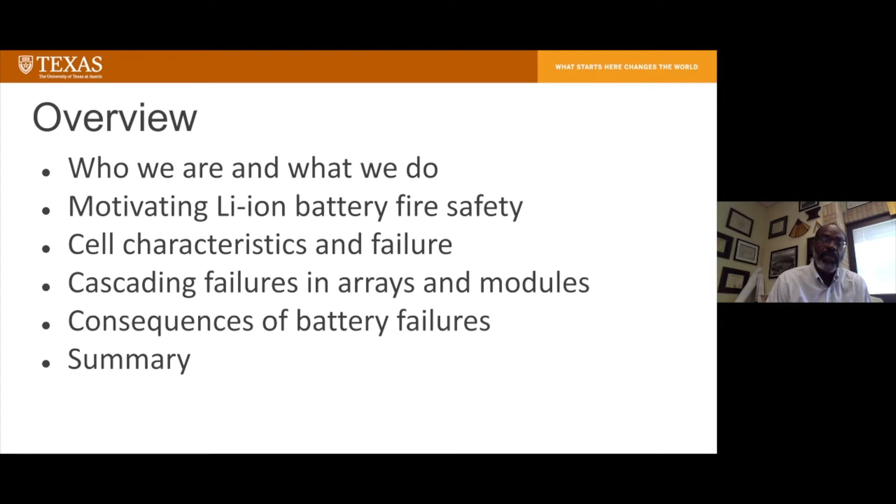We work on emerging issues in fire safety, and we've already pointed out some of these issues. Obviously, wildland fires are an extremely important issue right now, and we have work going on in that, in terms of ignition and ignition associated with firebrands.

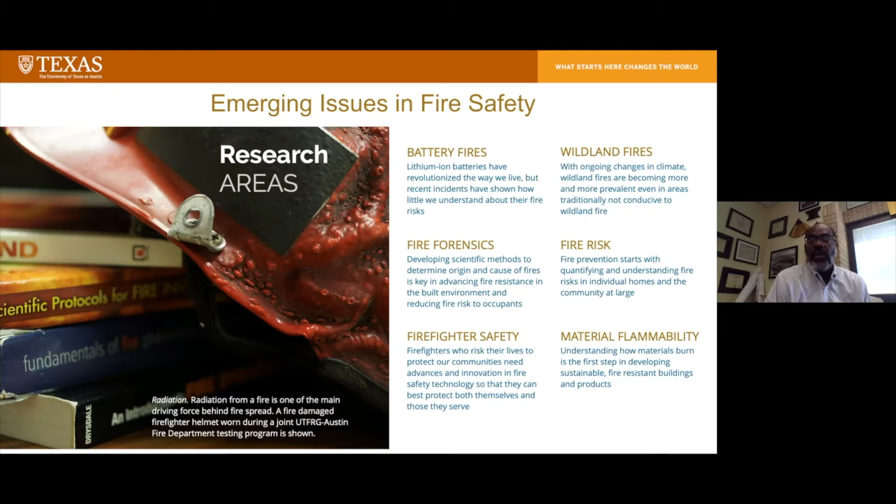In this talk, we're really going to talk about battery fires, which connect to our work in fire forensics. We'd like to understand the future of fire forensics and how to use data and models to improve the ability to understand how a fire occurred. These obviously all connect to firefighter safety. So let's keep moving.

In terms of motivation and background, as you can see, I am not a battery person, but battery issues are obviously very important as one of these emerging fire safety issues. I've been trying to learn as much as I can about battery issues, and you'll see what I'm learning as we go through.

It's no surprise that we're entering an increasingly electrified world, and these are good things, a positive. Distributed energy generation resources are allowing a lot of things in terms of protection of the environment and access to multitudes in the world that we really haven't looked at in terms of energy resources. Immediately, the things we see are consumer electronics, electric vehicles, and every so often, as we walk around our neighborhoods, we see solar panels and the connections between all of these.

In general, in my opinion, battery systems are quite safe, very safe. That said, opportunities exist to improve the safety and performance. Quite a bit of work is going into performance. The University of Texas at Austin, my department, Walker Department of Mechanical Engineering, is a leader in the development of lithium-ion battery technology and other battery technology. A lot is going on in this space, and our view is that as this is being developed, there's a real need to understand and improve the safety issues.

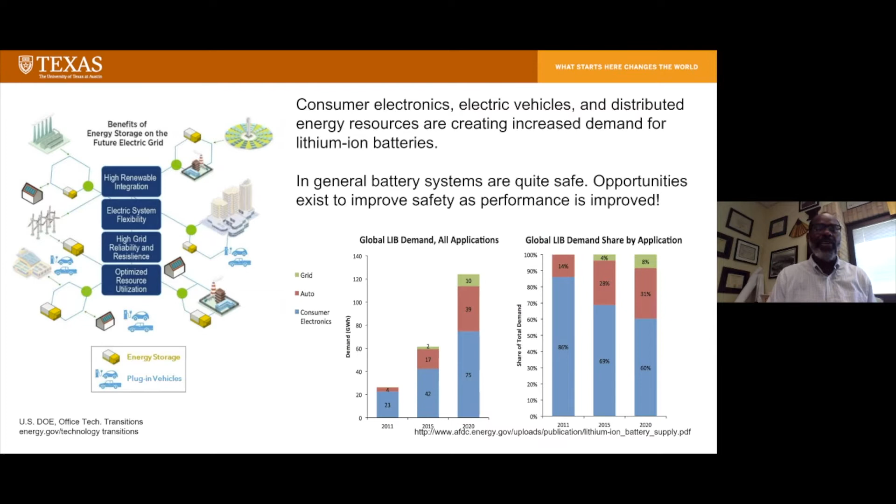These are old, relatively older demand forecasts. We're in 2020, but the growth forecasted for lithium-ion batteries is spectacular. I was disappointed that we didn't hear about a million-mile battery, but there are still lots of opportunities and development in this space. These systems are going to continue to be used.

Again, what the applications are - we see this routinely. Perhaps less so is an awareness of what happens at grid scale. We see this in our phones, which are on the order of 10 watt-hour systems. This is a varied audience - I'm going to be speaking to some people who are experts on the battery side, some experts on the fire side, others who are just interested. So I'm going to offend everybody, basically.

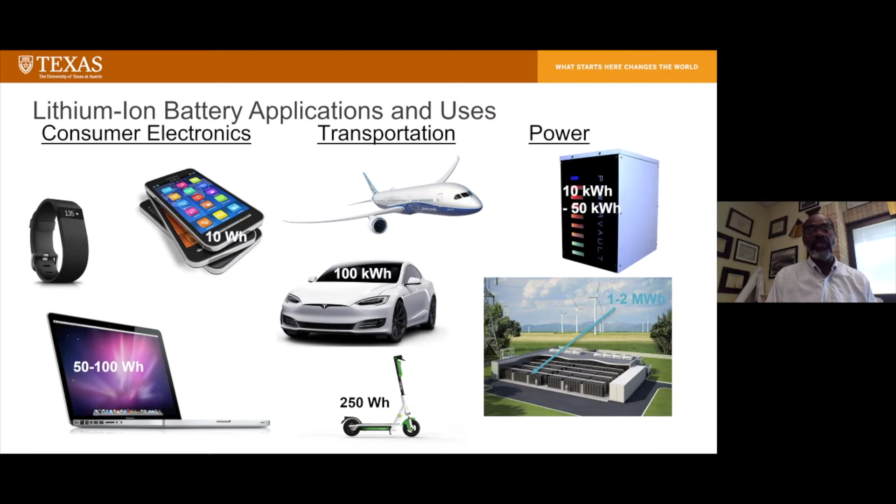Laptops might be 50 to 100 watt-hour systems. We're talking about the energy available, or the capacity, of these systems. You might have 100 kilowatt hours within an EV, but you could have 1 to 2 megawatt hours in a containerized system, just one of these little containers within a larger energy storage system for grid scale or utility scale applications. So there are lots of scales in terms of what we're dealing with here.

Now, one of the important aspects of renewable energy and sustainability is the circular economy. Many of you know this - shown on the left here - it would be great if we could recycle and return things to some previous state after use. That's wonderful, something I think societally we want to move towards. We view that as an important issue, but there's another circular economy associated with safety, and that's what you're seeing on the right there.

As cells are being used in various types of applications, there's a logistics process occurring too in terms of storage and transportation, use, end use, transportation throughout, and there are stop signs and checkpoints where standards - working with fire service, codes and standards officials, authorities having jurisdiction - evaluate the overall safety of these types of systems. This is borrowed from a friend and colleague, Ron Butler, mentioned earlier.

Based on his holistic view of safety in these systems, this is something we think is an important aspect of this other circular economy. It's a safety circular economy that we need to be thinking about.

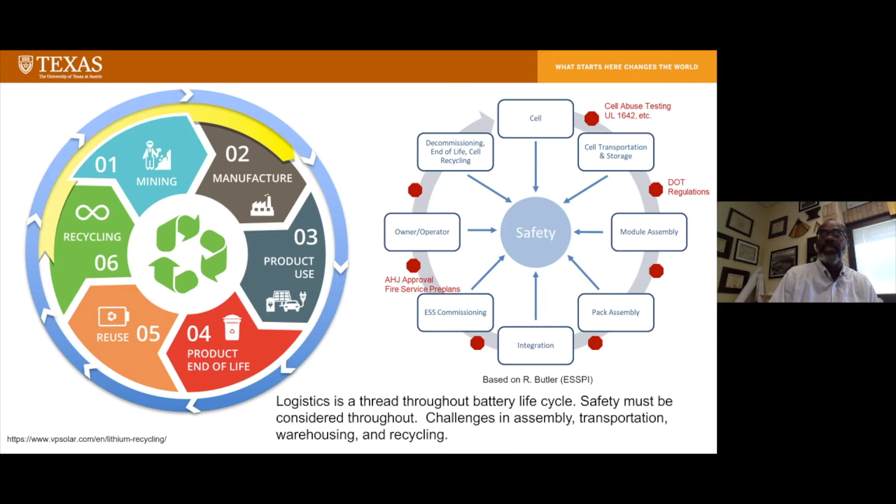I'm not trying to be the bearer of bad news and doom and gloom, but bad things happen in uses of batteries. We want to understand those cases so we can design systems to mitigate failures. Failure data is relatively hard to get for battery systems. We think it's 1 in 10 million cells, but it's very difficult to assess the frequency of failure. But every so often, cells do fail.

On the left, somebody is running a gig economy business charging scooters in their garage in Fairfield, California. In the top right, someone was doing something similar with electric bicycles, charging them out of their garage. Unfortunately, there was a fire. I can't say if the fire was because of the batteries, but fires happen routinely. The fact that there were batteries there increased the consequences, elevating it to a hazardous materials fire. Several firefighters and police officers were hospitalized because of toxicity issues, and there was a shelter-in-place order for that neighborhood. You see the street closed off, and there were lots of news stories about this hazardous materials problem.

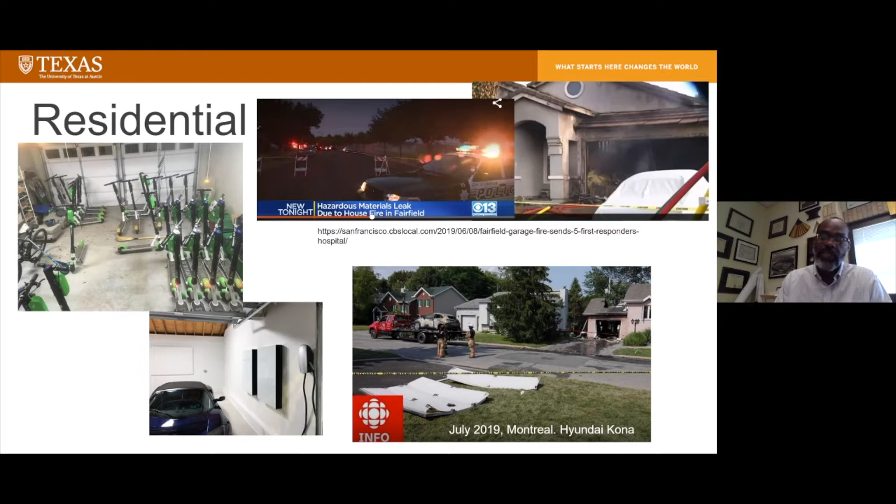We need to understand what sensor systems, detection systems, and suppression systems might mitigate something like that. On the bottom left, we see an EV in a garage with an energy storage unit. To the right is an accident in Montreal in 2019, where a Hyundai Kona was in the garage, and you see this gaping hole in the garage roof and the door blown across the street. There was a failure centered around the Kona's electric vehicle systems. This explosion, as much as it damaged the property, could have been even worse, with graver consequences had people been injured. How do we address that? How do we deal with it?

In terms of transportation, starting at the top right: in Houston, there was a train car carrying recycled batteries, and the conductor noticed smoke coming out of one of the cars and stopped. Subsequently there was an explosion, and you see the deformation of the car, with windows broken up to about a mile away. Fortunately it was a relatively sparsely populated part of Houston. But if first responders had responded to the initial notification of smoldering or fire within the rail car, they could have been severely injured.

It's interesting that in Bakersfield, California, a semi-trailer truck was carrying lithium-ion batteries and started smoking. The driver noticed something wrong and stopped. Fortunately, because of awareness of the potential hazmat and explosion possibilities, first responders shut down the highway and were much more careful in their response than may typically occur. So that's part of the transportation and recycling story.

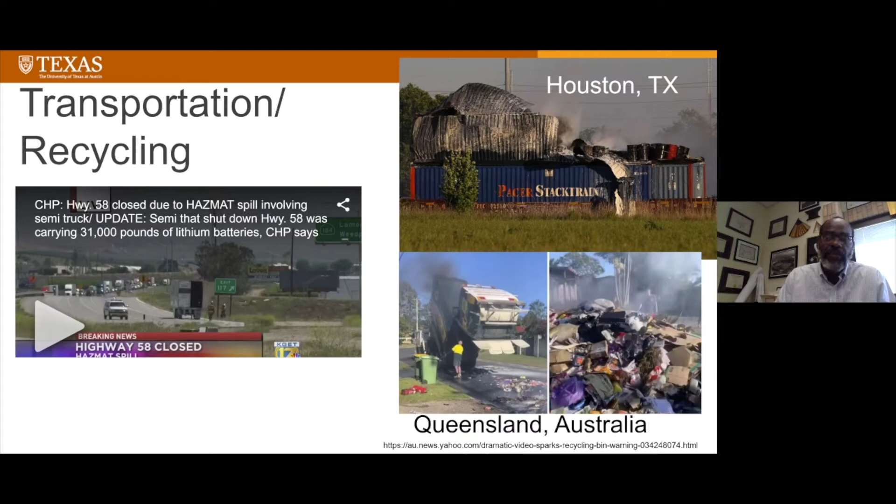In Queensland, Australia, and this is happening in the US and really all over the world, improper disposal of batteries is causing fires both in transport and at recyclers. We've gotten smarter at the University of Texas, for example, about what it means to deposit used batteries, because of the fear of fires in trash receptacles.

In terms of commercial and academic facilities, renewable energy is providing all sorts of opportunities for the storage and use of electrical energy. Not surprisingly, big box retailers and warehousing companies like Amazon and Walmart were putting in solar panels and energy storage, but it's really the solar panels — solar panels and energy storage oftentimes go together.

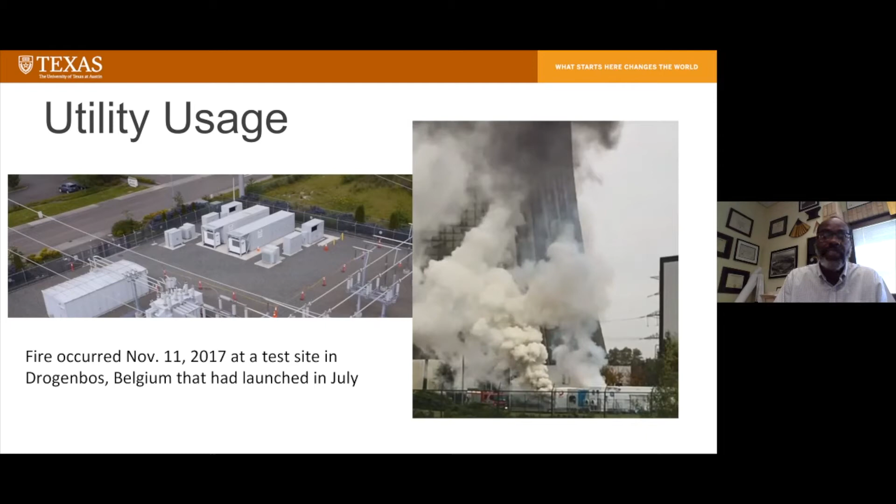In some sense the costs there are modest or moderate in terms of damages. There were several fires that occurred in energy storage systems in South Korea in 2018 and 2019, and that number continued to increase - initially 25, 26, it just kept climbing. There were environmental issues and use issues in terms of why these fires and failures occurred, and it's something we'd like to understand better so we can minimize these types of losses.

Closer to home is a failure that occurred in Surprise, Arizona, not too far from Phoenix. You see at the top right a containerized 2 megawatt-hour ESS with 64 amp-hour cells in modules stacked in a rack. At the bottom right, from the DNVGL report, is rack 15 where the failure occurred. What's interesting is how relatively little damage there is to the racks adjacent to it compared to this initiating rack.

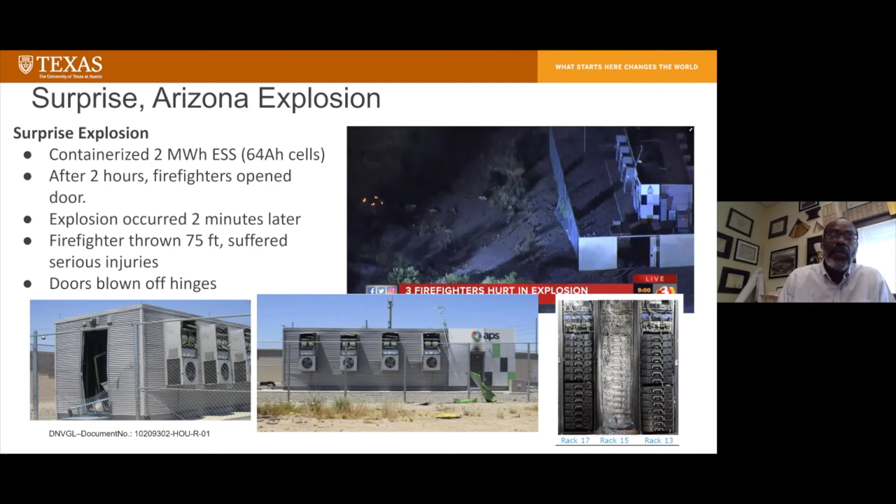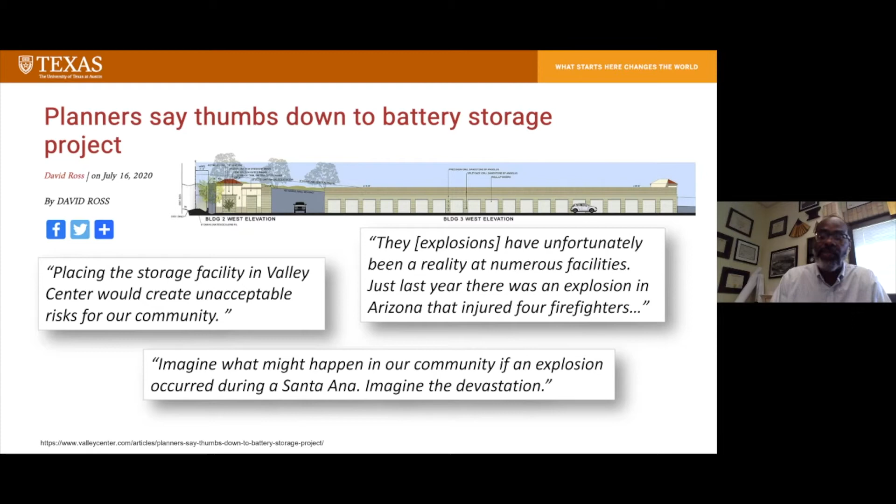So why do we care? There's growth in this market and demand for energy storage and lithium-ion batteries. But after accidents like Surprise, and a general awareness that maybe we aren't considering all the safety implications of these systems, people are responding negatively. It's damping down demand, even though there may be other positive reasons to move forward with these technologies. The inability, or at least perceived inability, to make them safe enough - which is often a moving target - has caused concern, and these are the types of issues we want to address through research.

You might ask, why do these failures keep happening? This isn't unique to batteries or battery systems - it's true of immature technologies. We're transitioning our energy system in a way where there's very little data on what to expect. This is a well-known diagram adapted from work done in Japan by Shiraishi and Furuta, who show that as you look at the percentage of failures that occur with technologies, in the early stages everything is essentially unknown, and it's these unknown conditions and phenomena that trigger failures.

Research is one of the bridges that helps us understand better how to think about those technologies, so that improvements can be made and this understanding can be codified. Given that it's codified, fewer of these failures are associated with unknown issues - they become known issues.

As we learn more, we know, well, yes, we should have designed against that because we know X, Y, Z. Eventually these things become human error, and obviously the failure rates in general presumably will go down. So these are the types of issues we're wrestling with in this relatively immature technology.

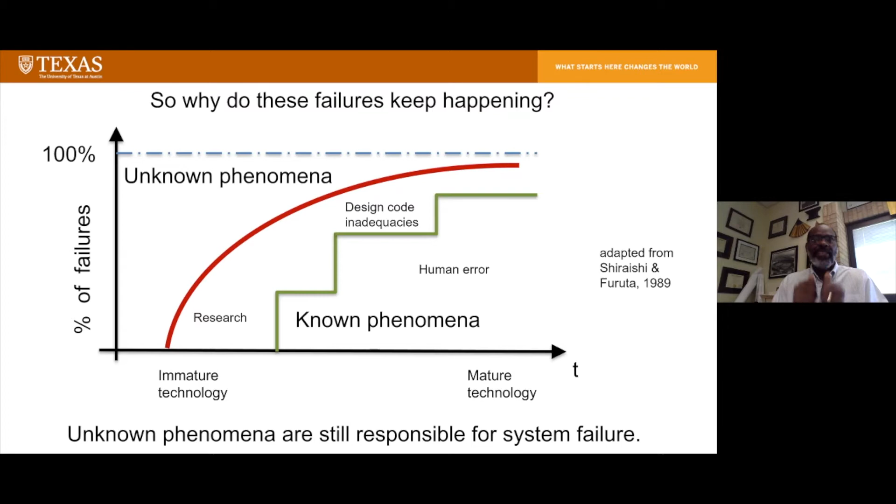The other thing I want to emphasize is that we're talking about systems, really. It's not just the cell or the battery, it's the battery system, and lots of different components to that. This is a test that was conducted by the FAA in a fire-resistant container.

Let me walk you through what the issues are. There are 18650 cylindrical cells in this fire-resistant container. A fire is deliberately set in there to understand the ability of a suppression system to extinguish the fire. The suppression system extinguished the fire, but the cells continued to go into thermal runaway.

There's this cascading failure that I'll talk about some more. As the cascading failure occurs, there's a buildup of flammable gases that leads to an explosion. Well, that's not that different actually from what happened in Surprise. This is much earlier than what happened in Surprise.

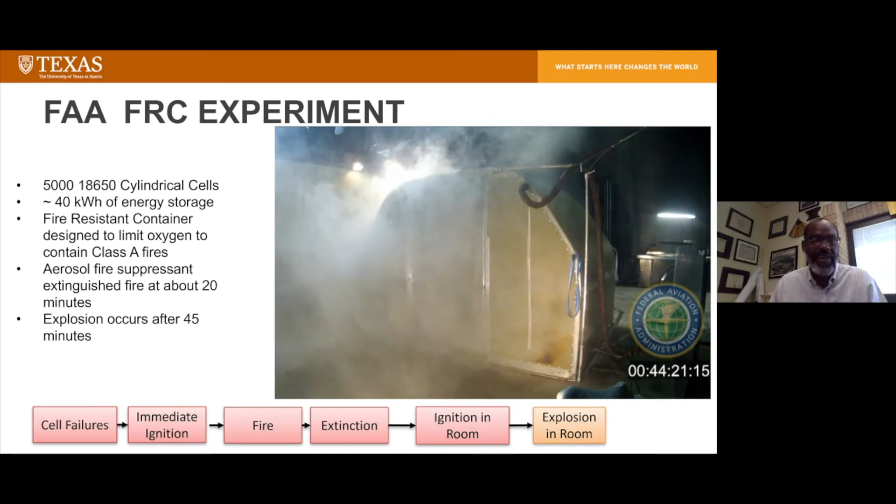So we're starting to see that we can actually connect the dots in different incidents under different conditions to show how failures occur in battery systems in these bad consequence, bad direction events. So that's a placeholder to think about as we move forward.

One of the big issues, true in all of engineering science, and true in this aspect of engineering science, is that as you try to bridge scales, you have to lose some detail in terms of understanding what might happen at the larger scales.

If, for example, we're interested in the consequences of the fire, in terms of the consequences of failures in terms of fires or explosions, that might be at the far right here at the site scale. It could be a room, it could be a building, it could be a container.

This is due to some failure that occurred in the cell. That failure in the cell could have been a manufacturing defect. It could have been a failure of the software system that's operating either the cell or the module that contains the cell. And so bridging these scales is the challenge.

We've tried at least to understand how failure at the smallest scale might affect things at these larger scales. The photos you see here are different cells that might be used in a system—there's a cylindrical cell, there's a pouch cell—and these are packaged into modules. These modules are packaged into racks.

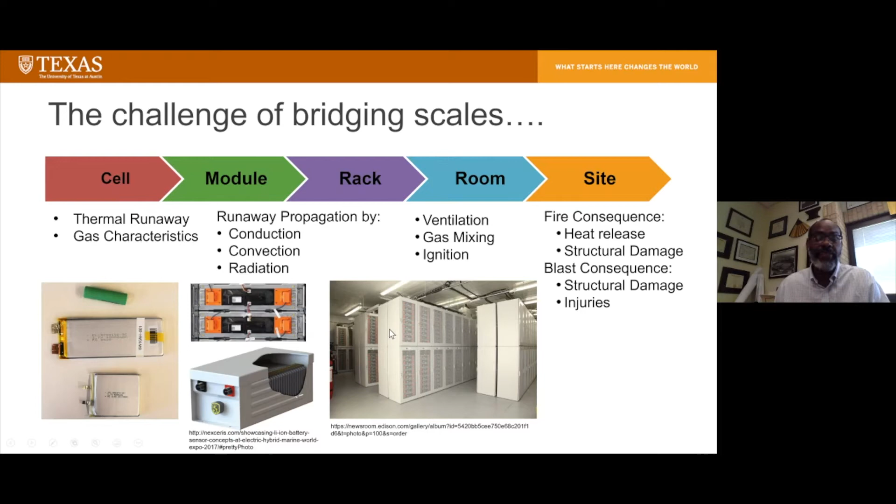You can have these in rooms, much like server rooms, and then you can have many of these at a site. So to perhaps understand and bridge that, there has to be some systematic framework or process to evolve the understanding at the cell scale to the module scale to the battery scale.

But batteries are expensive, so if you want to analyze a megawatt hour system, very few people have the $1 million to just burn, and we certainly don't. And so from that perspective, there is increased use of models as we upscale.

Even looking at a rack, you might be spending, in terms of testing, $100,000 or more to really understand how a battery rack fails and what the issues are associated with that. So obviously there's the need to minimize full-scale or close to full-scale testing, yet try to engage in as much testing as you can at smaller scales to understand what might happen at larger scales.

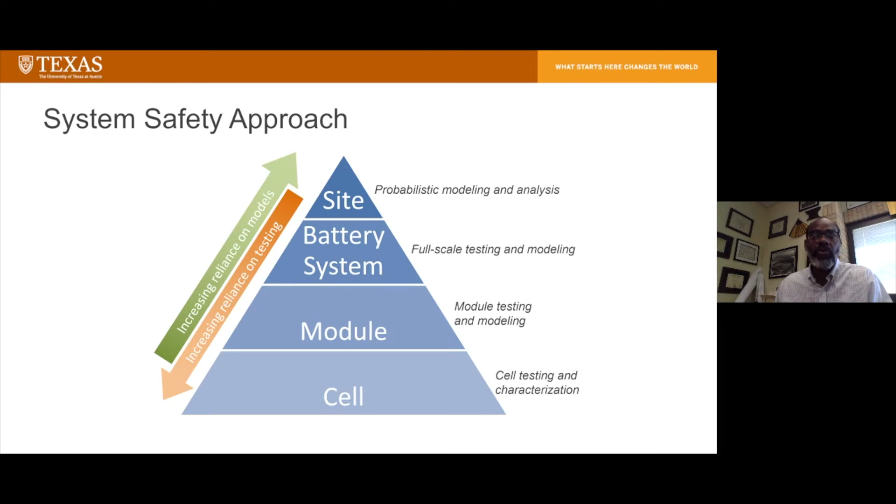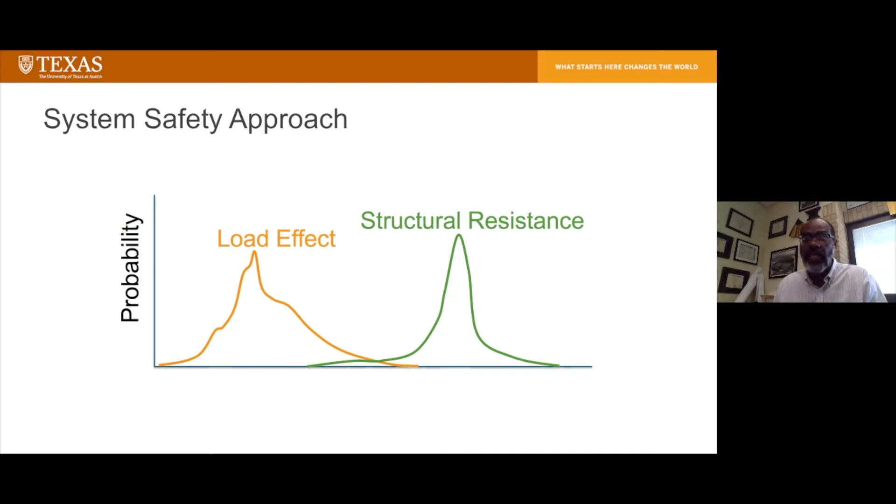Now, having said that, randomness, material property changes, and all these other variations affect what the final result might look like. So we try to incorporate probabilistic estimates of parameters and statistical models to upscale these predictions, so it's not a single number, not a delta function. We want to say what is the space of results we can imagine predicting given what we know at smaller scales. This is well known in structural engineering and civil engineering disciplines.

So a little bit about causes of failure—just checking my time here. In terms of causes of cell failure, we first have to start with what a cell is made of.

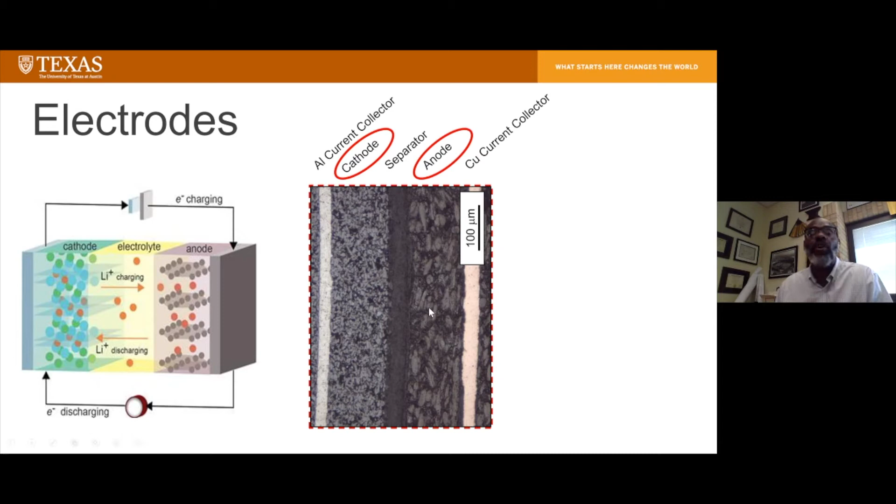A cell is made up of a layered structure. For a cobalt oxide system, there's an aluminum current collector, a cobalt oxide or some sort of oxide cathode, a separator material which is a thermoplastic, an anode, oftentimes a graphite type anode or carbon anode with some sort of binder, like PVDF, which is a thermoplastic fluorinated system, and then a copper current collector. All the happening is going on at these relatively thin scales that are superposed or added together to form the cell itself, and we'll see that shortly. This is all filled with an electrolyte so it can shuttle the ions across.

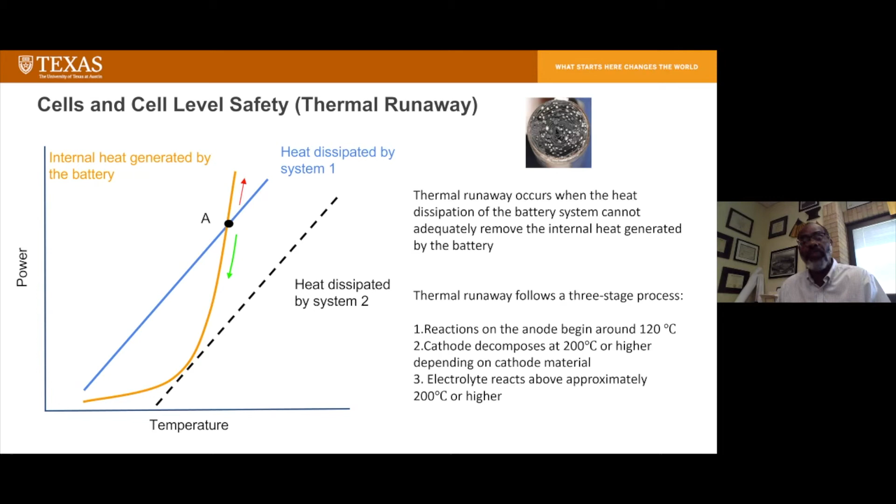It's various reactions that occur within the cell that allow these to occur, and unfortunately, all the material is built into the cell to allow this thermal runaway event to occur. It depends really on the temperature that occurs within the cell, and so adverse operating conditions can lead to these thermal runaway events.

Now, these can be triggered because of manufacturing defects, for example, contamination effects. The requirements in terms of battery assembly require that we don't have metal shavings or filings that are potentially deposited in this layering process as we're creating the electrodes. These are all important issues that one has to consider.

Welding defects may occur, and again, this might lead to some sort of internal short in the system. Separator tears, if we have a tear in the separator, then we can have an internal short within the system, and that again causes problems.

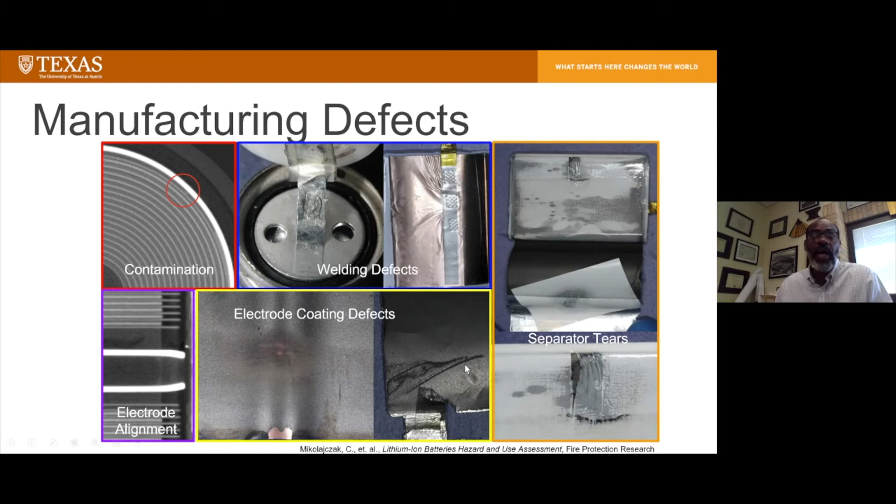We'll talk about a case in point, the Samsung Note 7, where unfortunately for Samsung there were two battery failures that occurred, one in the primary design and then in a recall. In these situations, it was a defect in the design, probably for battery A, where the pouch was crimped and so the electrodes were bent. These negative electrodes being bent meant there were opportunities for plating and internal shorts within the cell. In battery B, it was a different problem.

It was a short that was dealt with, because of some burrs, really improper manufacturing on the positive electrodes that pierced the separator and caused this short to occur. So manufacturing issues are critical in terms of minimizing cell failures.

Electrical abuse is something that can and should be dealt with because of the battery management system. If you have an incompatibility, this speaks to the idea that this is potentially a system failure, because if there's an incompatibility between your charger and your battery and it's not designed appropriately, you may have conditions where you're overcharging or over discharging or putting too much current into it.

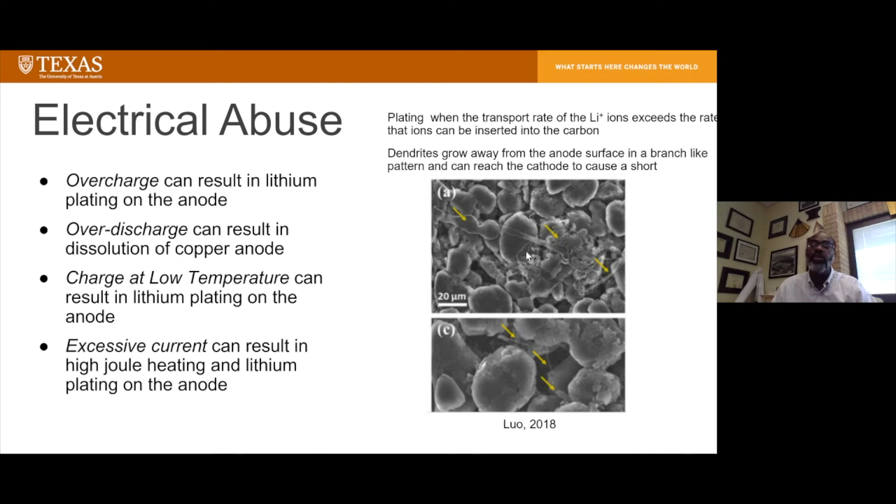These dendrites were piercing the separator and causing a short because the separator is allowing the lithium ions to pass through, but not allowing the system to short. So from that perspective, once you provide a short circuit by poking a hole through the separator, you have failures. In a plating situation, if your lithium ions are unable to insert themselves within your active material on the anode side, you get a plating process that occurs, and you get this dendritic growth off of it. These tubular structures are these dendrites growing off the active material on the anode side.

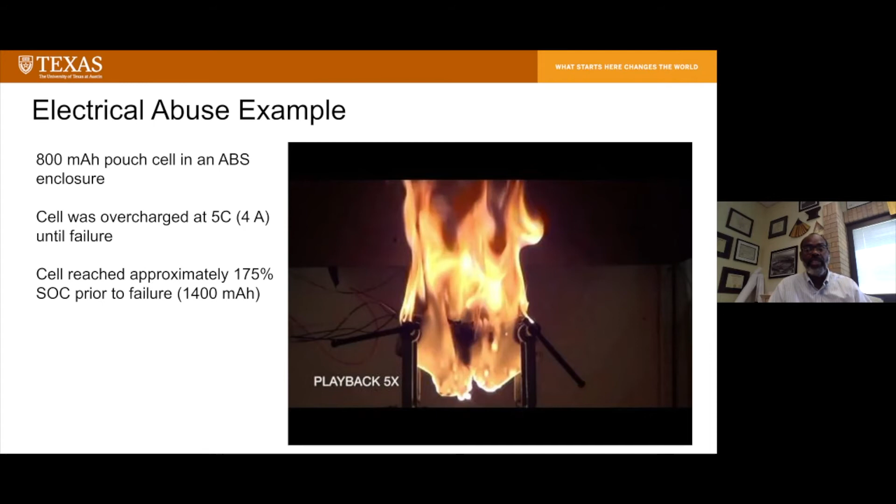But in the overcharge scenario, it's relatively easy to fail an overcharge, as you just saw. What you're doing is dumping much more energy into the cell than it's designed to accommodate.

Mechanical abuse is pretty clear in terms of what it refers to. As you think about a mechanical abuse condition, this could be bending, some sort of vibration, or impact.

As you look at this BYD electric taxi in China, there was an accident. Again, there's deformation of the battery. Deformation of the battery causes an internal failure that looks like one of the things you could see in a manufacturing defect, which causes an internal short, heating, thermal runaway, and bad consequences.

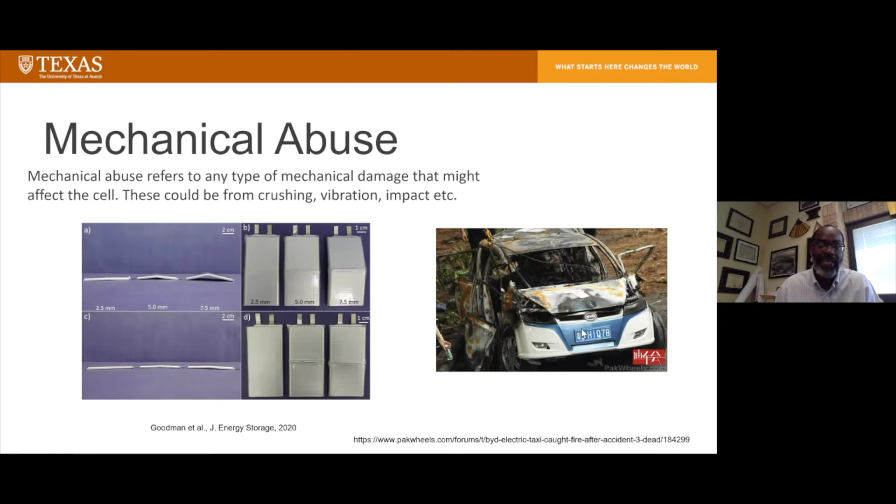Thermal abuse is what we do in our lab, so I'll speak more about this as we go through. You see different configurations where we thermally fail cells, and so we'll thermally fail a given cell and allow that propagation to occur.

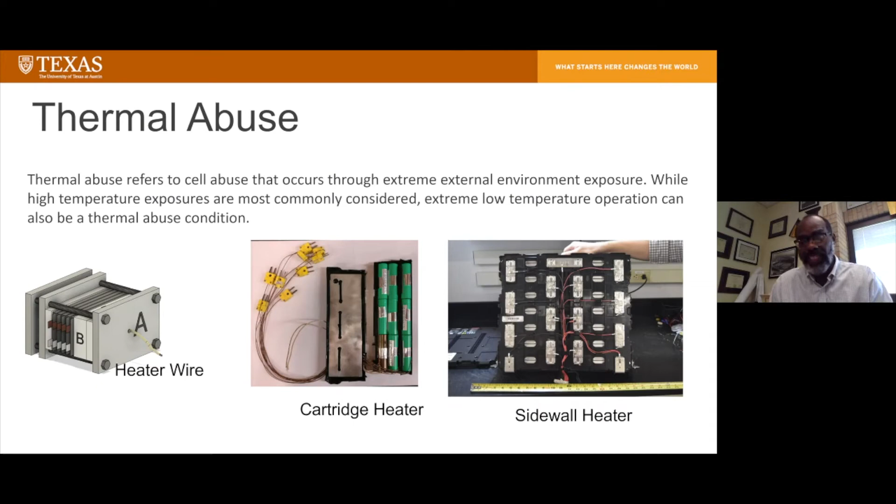I'll talk a little bit about battery protection systems. Battery protection systems are great. So battery cells have protections built into them, but if you have a significant enough failure event, it's incapable of dealing with this severe environmental condition. So some of the cell level failure detection protection systems - I put detection in there because detection is an important aspect in both cell, module, and site protection. Detection is critical, and we'll talk more about that.

Positive temperature coefficient: cells can be built with something that will limit current under high temperature conditions. The PTC does that, and it's a graphite and polyethylene mix, or carbon polyethylene mix, that increases resistance as it gets hot.

Shutdown separators are also important in terms of minimizing thermal runaway events because, again, of overheating. Current interrupt devices, same kind of issue. People are adding flame retardant chemistries, or have evaluated flame retardant chemistries, in the electrolyte, and there's been some positives associated with that. Solid state electrolytes are a direction people are looking in terms of minimizing these cell level failures.

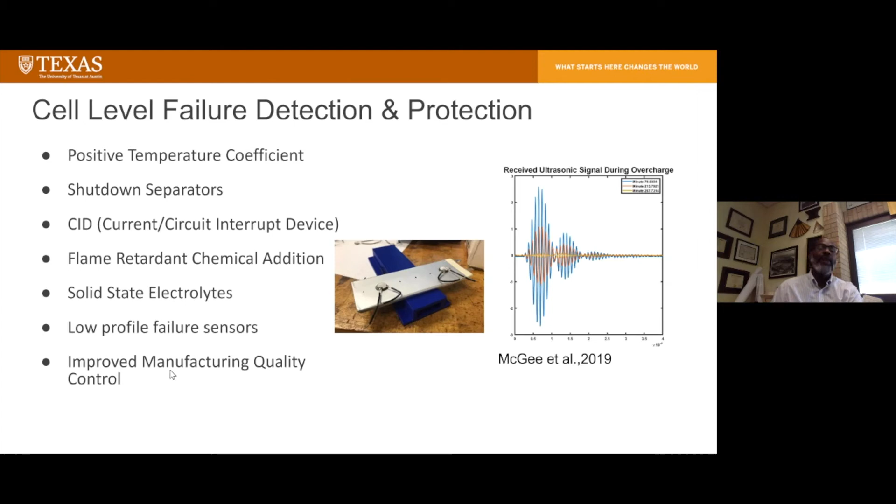From a sensor perspective, some sort of failure sensor is important, and this is work that was actually done here at UT. Mike Haberman and I were looking at this - Tyler McGee was the person who actually did this work - looking at ultrasonic recognition of an overcharge event. The question becomes: if you can make this ultrasonic testing low profile enough, maybe that's an indicator. And obviously improved manufacturing is also very important.

Now, as I said, there are hazard conditions that you simply cannot protect against because the fire started somewhere else and you're trying to minimize the consequences. The sequence of events that causes exothermicity is very complex, and really there is no consensus on the rates and the paths that these take.

As a combustion person in gas phase chemistry, we have a pretty good sense of what causes a flame to occur, or what the process of ignition looks like. Well, this becomes harder and harder as you go to condensed phase systems. Understanding ignition in a condensed phase system is much more challenging, as is the kinetics of degradation and pyrolysis in condensed phase systems.

This is, I think, an order of magnitude more challenging because it's an engineered system, not unlike polyurethane pyrolysis, but with exothermicity generated internally, and the fact that there's oxygen generation even within the cell - that's a critical point. In the cell, in the anode reactions - things like the solid electrolyte interface - there's a passivation layer on the anode active material, and this can decompose, it can regenerate, and there are reactions and exothermicity associated with that.

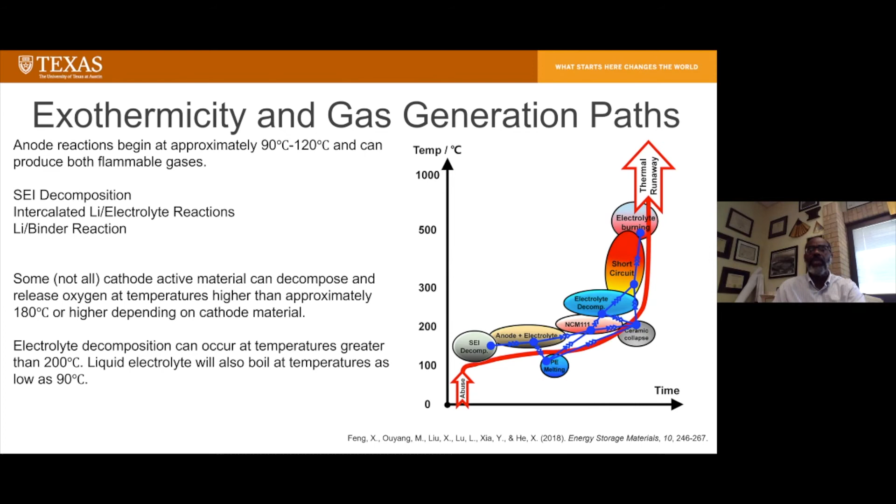And there's also generation of hydrocarbons associated with that, from some of the lithiated carbon reacting with the electrolyte. We have hydrogen generation and hydrocarbon generation on the anode side. At later stages, as it's getting warmer, we get cathode reactions at high states of charge that release oxygen. So we have a hot system with oxygen generation on the cathode side and hydrocarbon and hydrogen generation on the anode side. You get gas phase reactions even within the cell, and bad things happen. So those are the issues that make this problem challenging.

Okay, so moving on to some results. We and others have been making measurements of the composition of gases released in a thermal runaway event within a cell.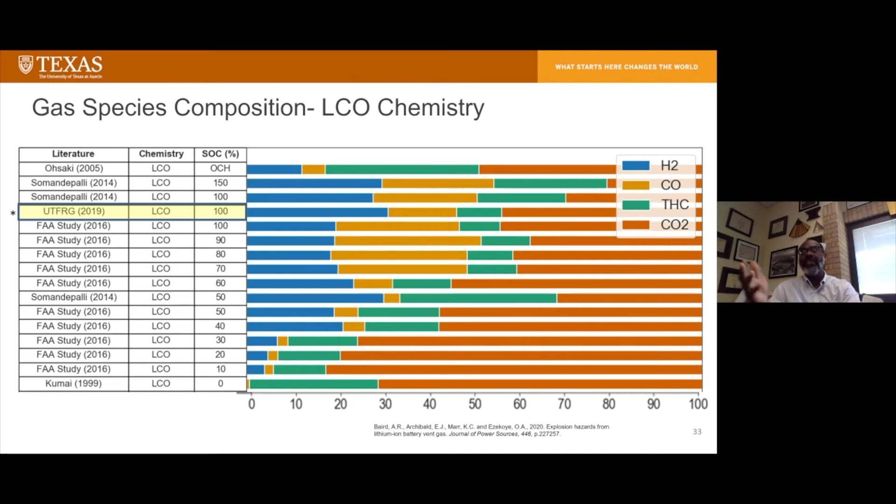One of the concerns is that it releases flammable gases like hydrogen, on the order of 20 to 30%. That's troubling. It's also releasing carbon monoxide, a toxic gas, on the order of 20 to 30%. That's not good. Total hydrocarbons are on the order of 10%, and CO2 as a byproduct of some of these other reactions occurring inside. So it's a flammable mixture.

Our go-to system for evaluating this is called LIB-VeGA. This is our system for evaluating it, where we fail cells and cell arrays, and then do gas analysis.

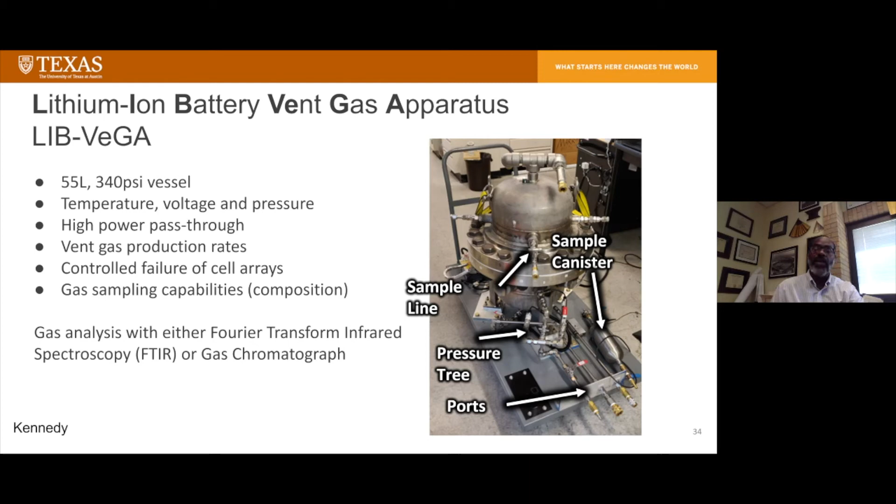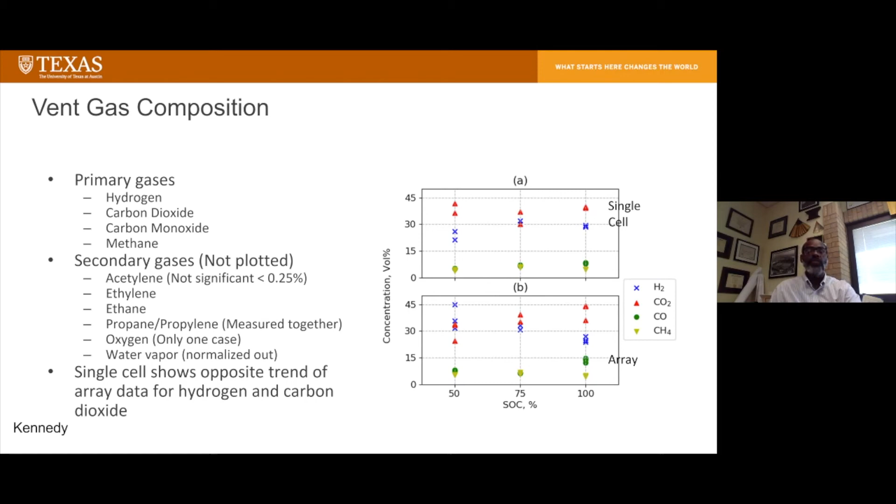Robert Kennedy has worked quite hard on producing this, and he recently gave an SFPE webinar that went in depth into some of the results. We've done this as a function of state of charge for single cells and arrays of cells. One interesting issue is that while single cell failure is the predominant way of characterizing these systems, in a cascading thermal runaway event, the array might be more useful for understanding it, and it's somewhat different.

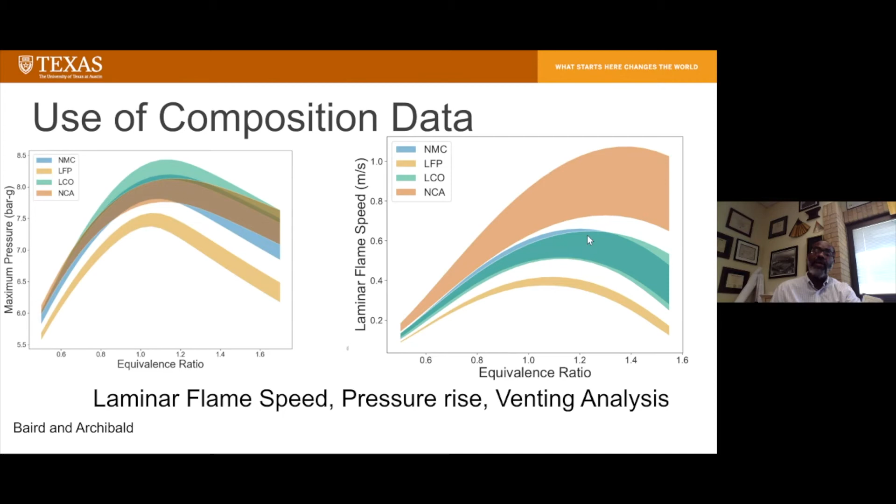As we look at the composition data, we ask what this composition means in terms of laminar flame speeds, as an example. The laminar flame speed is a direct input into the explosion hazard, because the turbulent flame speed is based on the laminar flame speed. We see differences in chemistries associated with, not surprisingly, the composition of the vented gases.

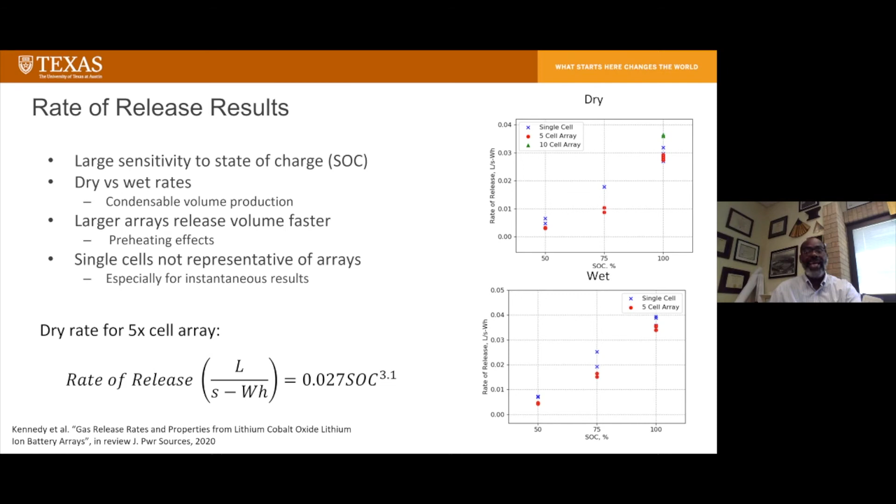The rate of release is extremely important. So if we're trying to design a ventilation system, or just understand what the heat release rate for failed modules or failed racks might be, we have to understand the rate of generation of the gases. Robert has done a nice job understanding how that might scale with the state of charge.

Haoxian Yan is looking at, given these evolving gases, what it means from an ignition hazard perspective, and how we might better understand whether a cell caused an ignition and a fire as compared to being the victim of a fire. He's built up several systems to understand what the gas production looks like in terms of temperatures and heat fluxes, and what the ignition hazard looks like.

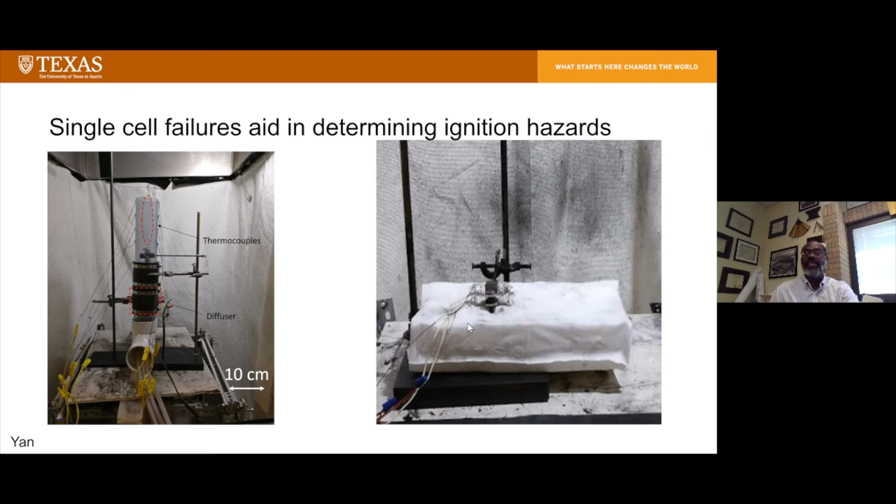So the sequence of events: this is a single 18650 cell, showing gas production and luminosity associated with it, and temperatures in an inert environment. He runs this for an inert nitrogen co-flow and also for an air co-flow. Temperatures are nearly 1,000 degrees Celsius for the inert environment, so these things are coming out incredibly hot.

In the air environment, it continues to burn, and we see the temperatures within the system continue to increase. We also look at the heat fluxes, which can reach up to 0.4 megawatts per meter squared for the air environment, compared to about 0.1 megawatts per meter squared for the inerted system. Why does this matter?

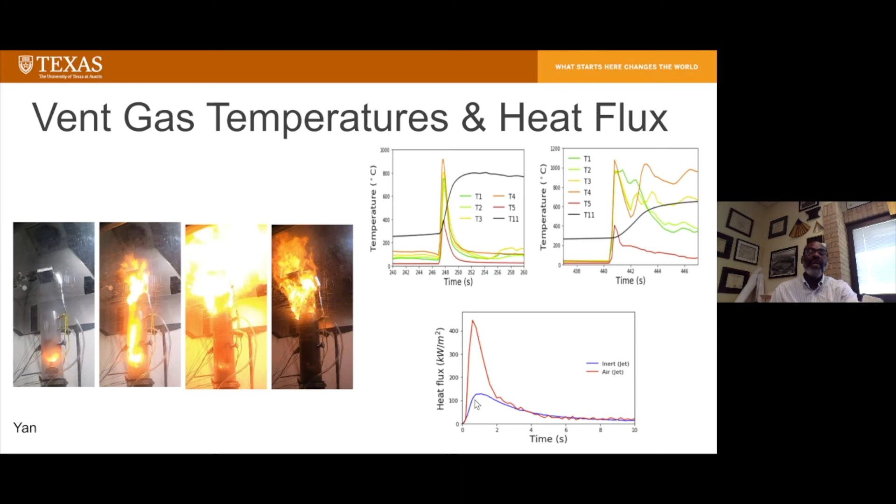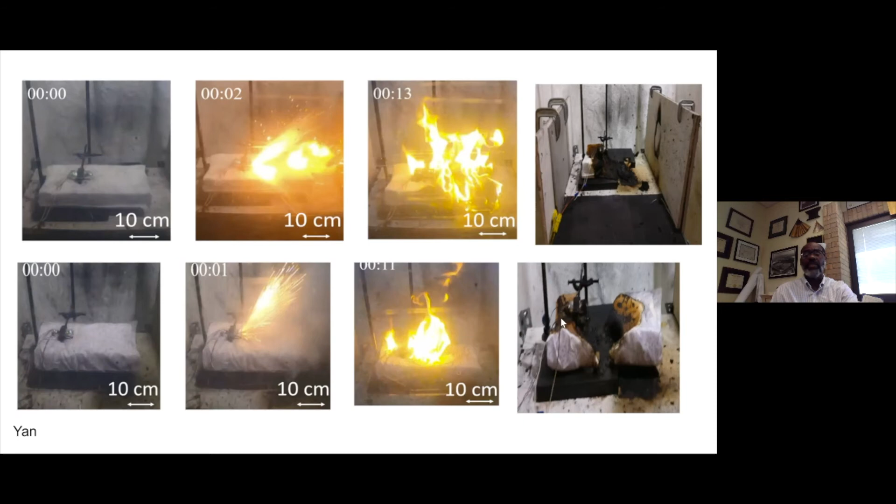This matters again for ignition processes. The top shows an ignition event at 100% state of charge, with complete destruction of the polyurethane foam. At 75% state of charge, it's delayed, with quite a bit of consumption but not as much. At 50% and 30% state of charge, all of a sudden we're not seeing all that much damage.

So if I'm an investigator, the question is, how do I know? If I know that the battery that was burnt up was at 50% state of charge or 30% state of charge, I'm less likely to believe it was the battery that caused the failure. These are the types of things we're trying to understand, and there's a lot more work that needs to be done there.

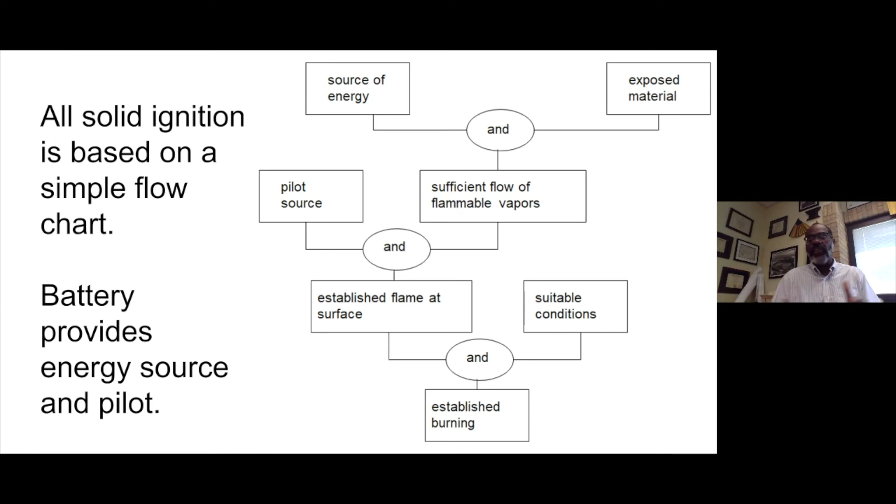Solid ignition in general is a complex process that requires heating and mixing in of vapors to reach flammable conditions. In fire science, we have a process called a flux time product that allows us to understand how things are ignited. These concepts come together with some of the work we've done to understand that better.

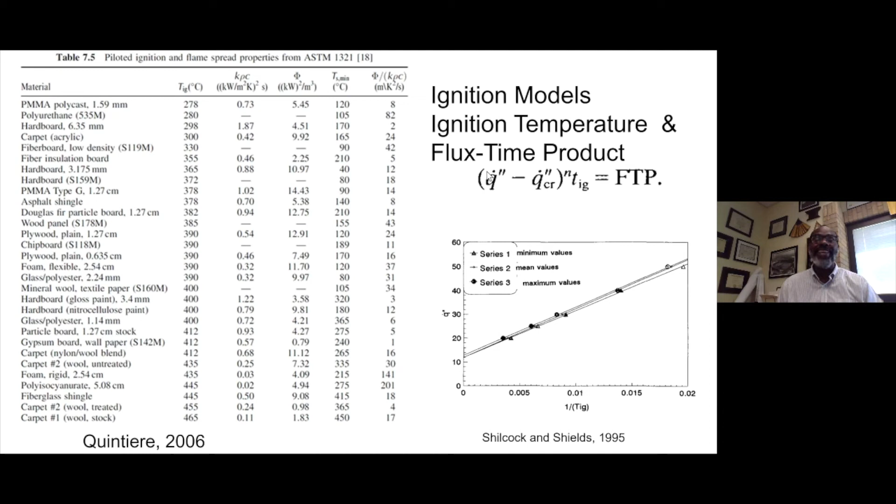I'm going to wrap up soon, but I want to talk about multiple cells and sites. Robert Kennedy and Eric Archibald have looked at propagation in these types of systems. We have an array of pouch cells, I think these are 10 amp hour cells, ten of them. So prior to failure and post failure because of a thermal event, you get a propagation, and Robert has characterized the impact of that in terms of pressure and temperature within the environment, within the space.

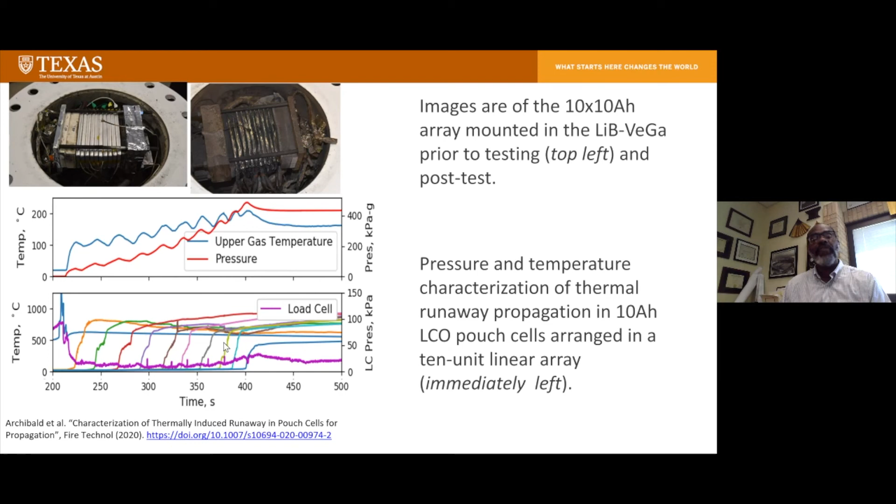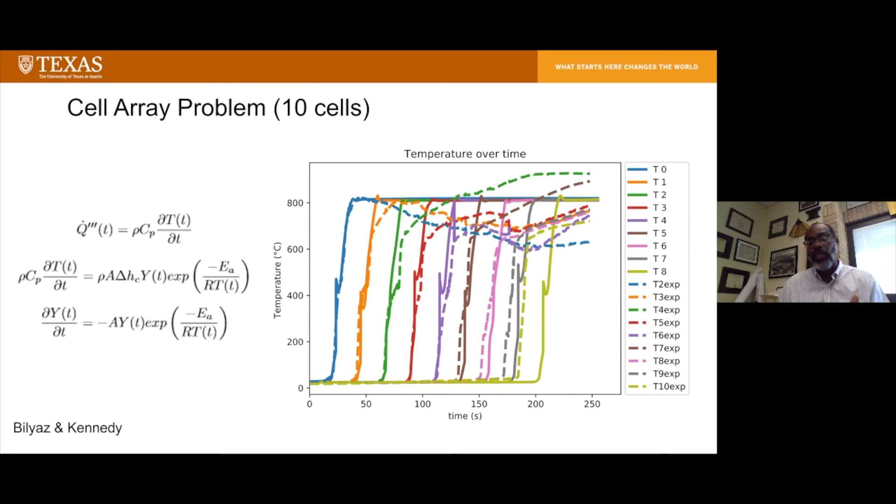This understanding of the rate and modeling of the rate, which Serhat Bilyaz and Robert have been working on, allows us to come up with global kinetics to understand what cell propagation looks like. Then, using uncertainty propagation to understand how the parameters influence it, we can issue predictions for the consequences associated with this.

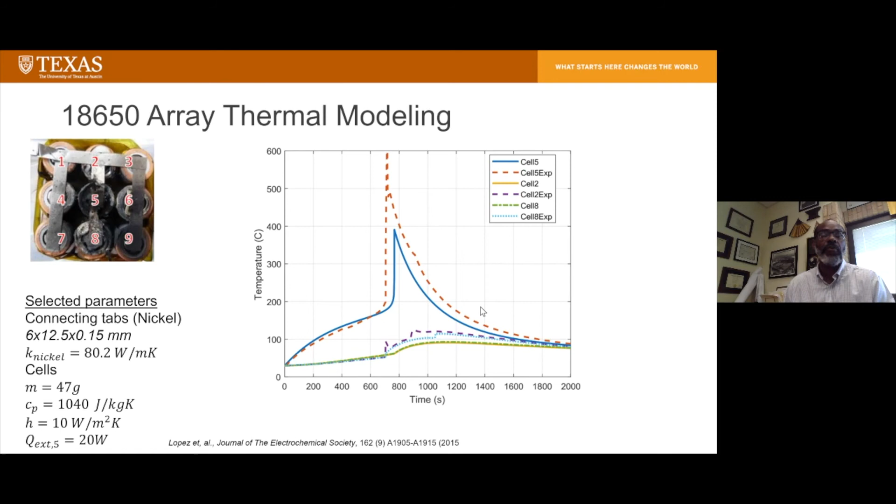The same ideas can be applied to an experiment done by Lopez, Mukherjee, and Jeevarajan on 18650 cells, where we can understand the effect of details like geometry on temperatures and thermal runaway. Pushing this further, what does this mean in terms of much more detailed modeling? That's work we're doing.

At the module and rack level, there are protection systems, not just detection systems, but a whole host of protection systems that occur at this level. One of them is insulation, so we're looking at the effectiveness of insulation.

These peaks represent cell-to-cell propagation events, and there's a time associated with one cell failing and the next adjacent cell failing. With 1 millimeter of insulation, again with these 10 amp hour cells, this significantly increases the time it takes for failure to occur. Perhaps with cooling, with phase change materials, we're able to extend that further.

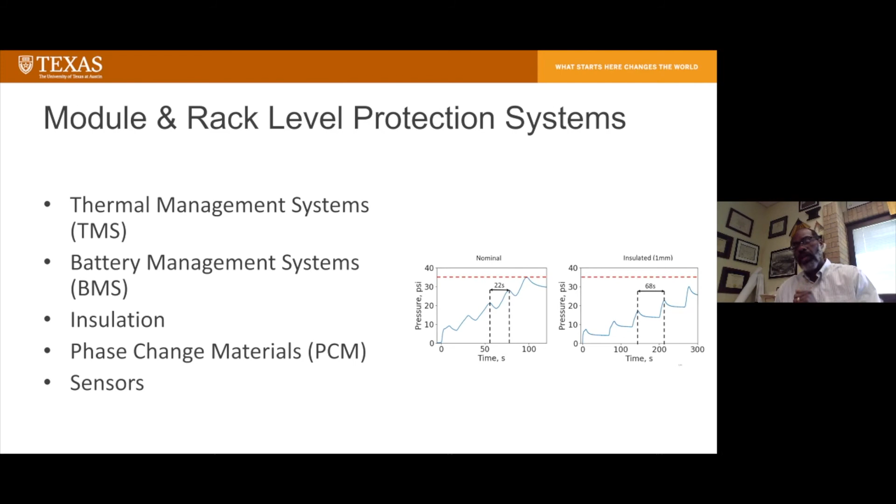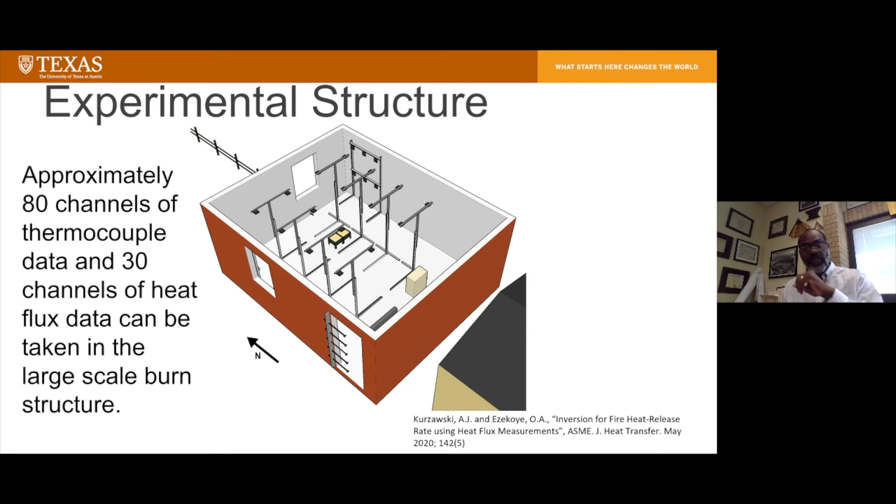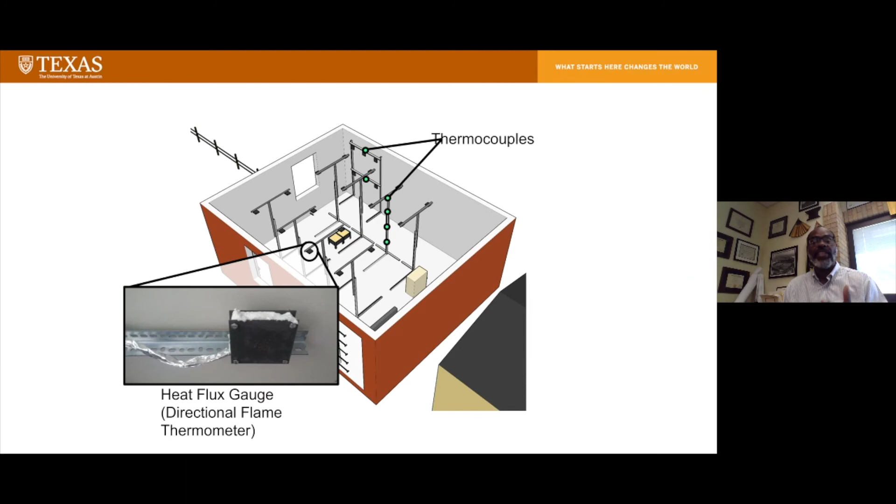Very last thing, I promise. We have an experimental system for large-scale testing that's densely instrumented with thermocouple data, heat flux data, flow meter characterization, burners we can dial in information with, and heat flux gauges and thermocouples, as I said earlier. Most recently, gas sensors have been added to it. We do failure studies of things like laptops within it to understand what happens if a laptop were to fail.

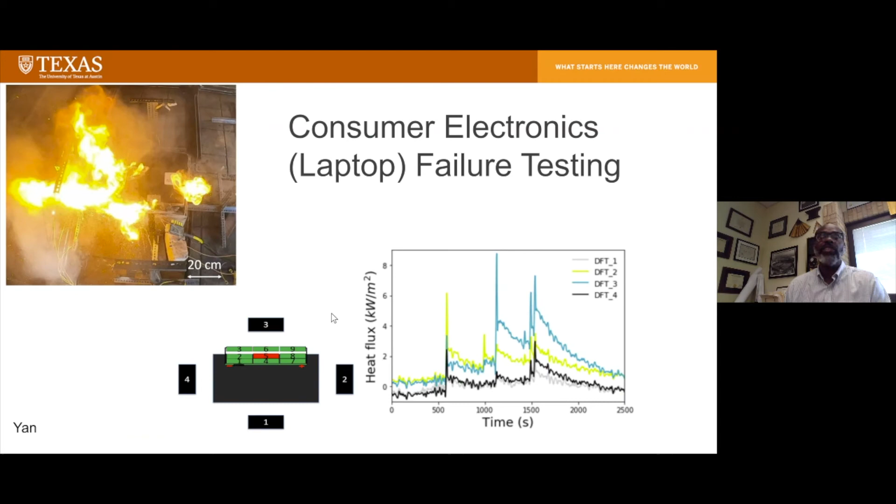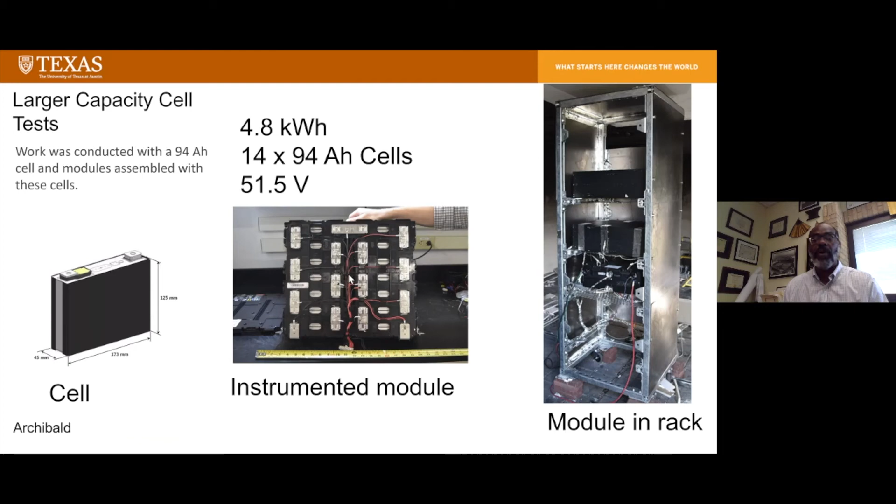With heat flux detectors adjacent to it, we can measure what heat flux occurs and what ignition events may result. We also do larger capacity cell testing to understand, given this is a 94 amp hour cell put into a module, put into a rack, what does this failure event look like? You can check out our YouTube channel, utfireresearch.com videos, to see some of these.

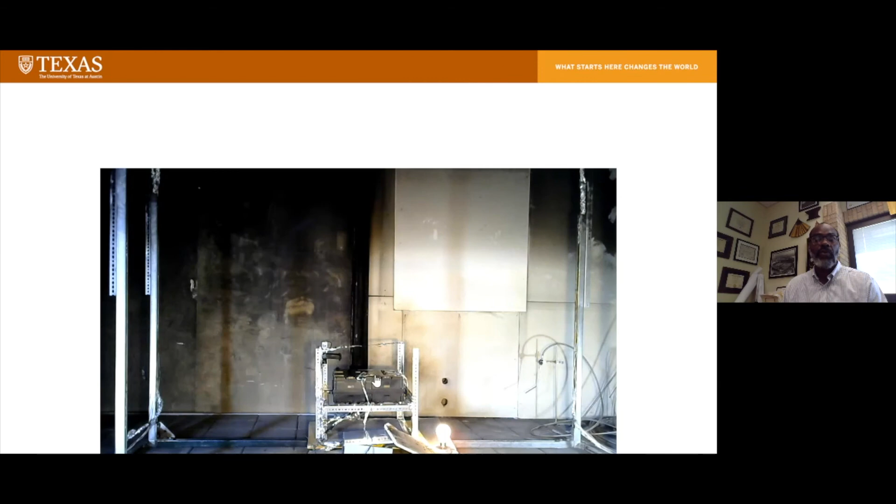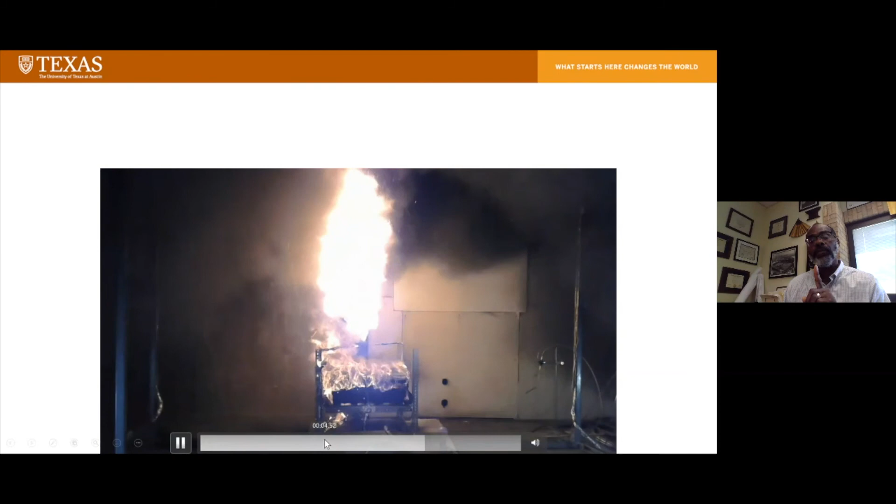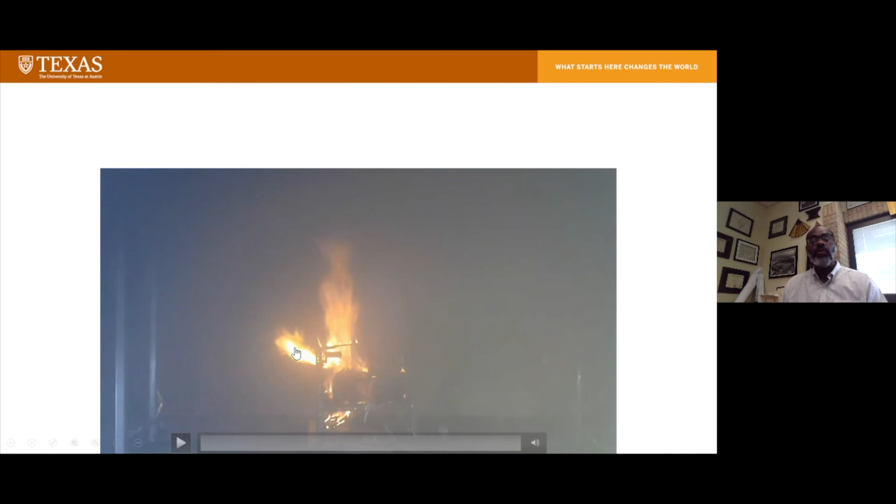Really quickly, here's a single cell failing within this module system. And that was a single cell that failed. There are 14 more cells that are failing. The geometry here is about 16 feet across, an 8-foot ceiling, and 20-foot depth. So we can measure the heat fluxes from that, and temperatures.

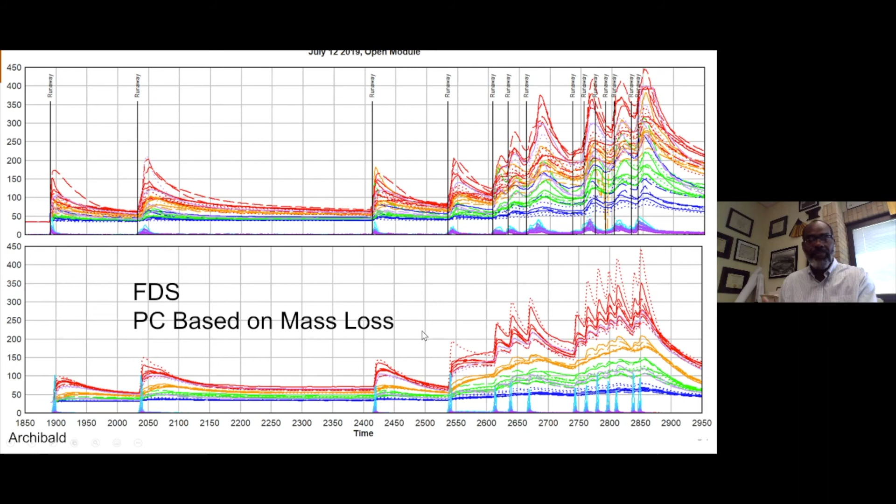Eric Archibald has looked at the experimental temperatures in this setup at high elevations and low elevations, along with the heat fluxes, and then modeled this using an open source CFD tool, Fire Dynamics Simulator. One thing he found really interesting is that the housing matters a lot. The polycarbonate housing has a really important impact on accurately predicting these temperatures and heat fluxes. The same things happen for racks, and in this sequence, for racks, here are the temperature measurements.

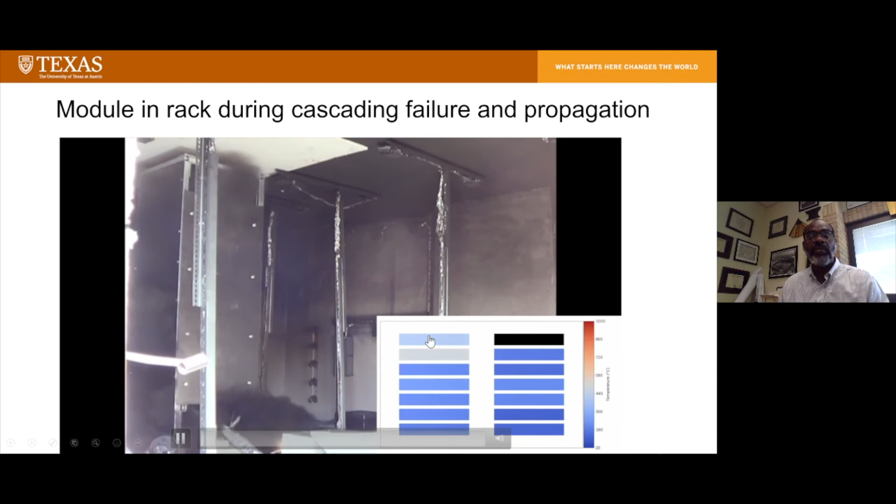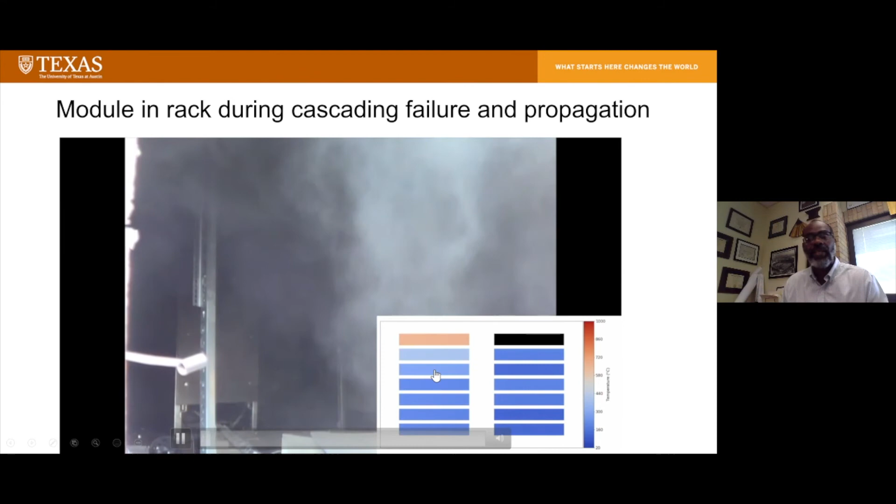Temperature measurements on cell propagation as this thing fails. We don't have time, I'd like to leave some time for questions.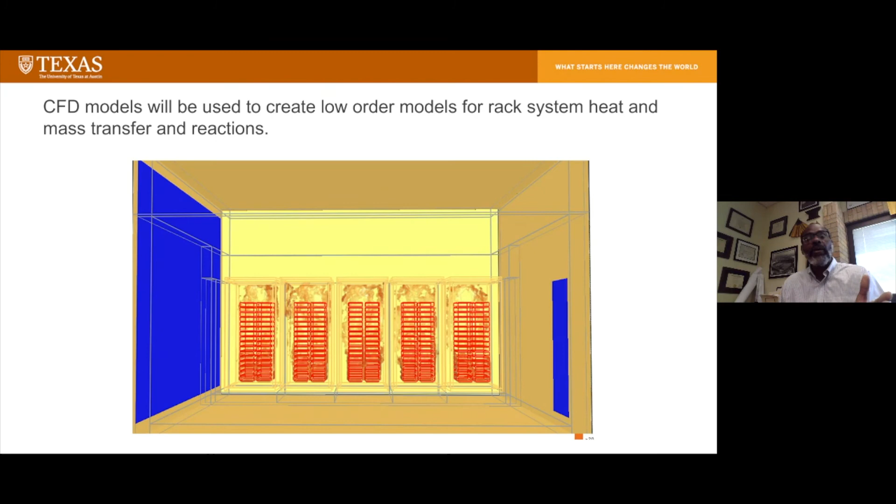So room scale, we're doing simulations at room scales, room scale fire protection. And when I say protection systems, I'm not meaning that these things necessarily work. It's very hard to get sprinkler sprays into a rack. Mist, I'm not sure that's been looked at in enough detail, but clean agents have been looked at.

I think they have a place in terms of fire protection, but in terms of managing thermal runaway, it's pretty clear, both between the FAA and Surprise Arizona, that cooling isn't there to prevent thermal runaway and cascading failure to occur. Sensor systems are critical in terms of whatever you do with this.

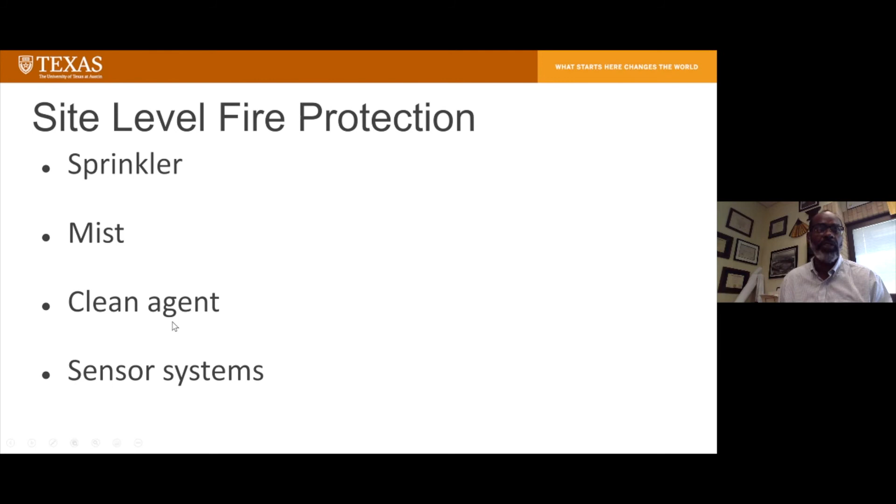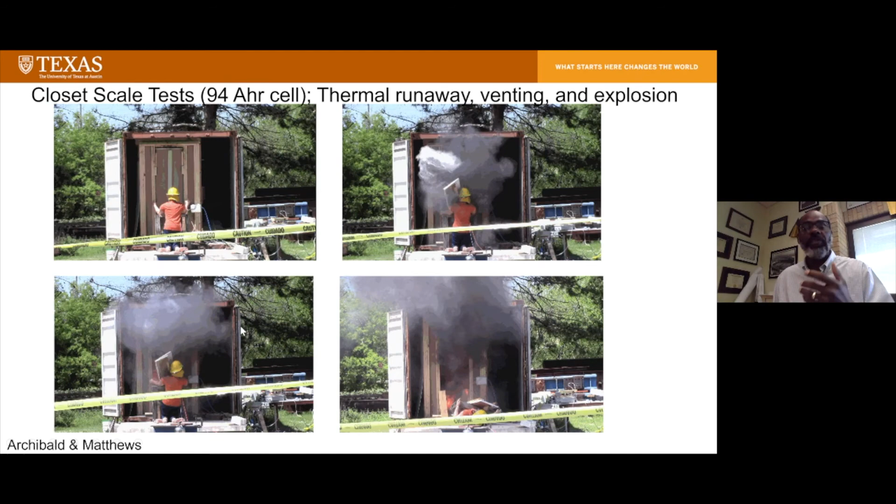I haven't talked about explosions. Fires, yes, explosions also. So this is a mannequin that we put in front of a closet that was built to simulate what might happen in a residential configuration if there's energy storage within a closet. This is a simple single 94 amp hour cell that we thermally fail and that causes an explosion. This is just a little GIF of it.

So that was the cell. Not a whole lot there. Site level explosion prevention - one of the obvious ways to do this is deflagration vents.

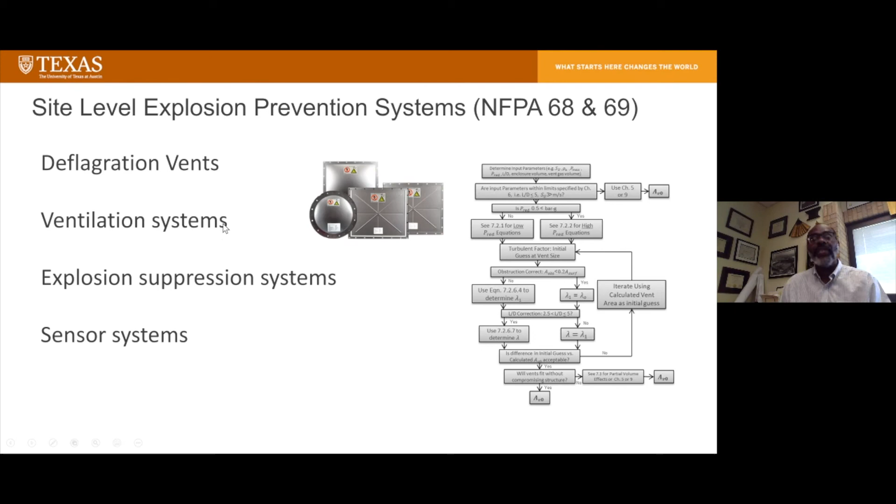Austin Baird and others in our group have looked at what it means in terms of coding the tool to predict what kind of deflagration vent you need. We're filling in some of the gaps - are these really the right models to use? Ventilation systems are important in terms of keeping the environment below a flammable limit, and there are also other systems in place.

So to close, I don't want to give the impression that batteries are dangerous. Battery systems are generally quite safe, and this is our future. I think we have to embrace electrification and the use of batteries as the storage mechanism for them.

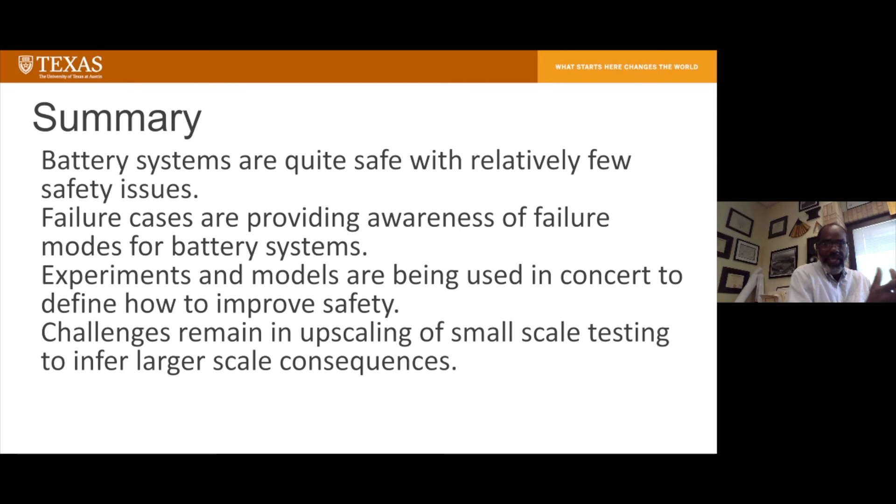Failures do occur, and as others are improving the performance of battery systems and cells, we think it's extremely important for us to focus on the safety systems, and we're using experiments and models together to improve the safety of these types of systems. There are amazing challenges and lots of good work to be done in terms of upscaling small scale results to larger scale consequences. I hope I left time for at least one question.

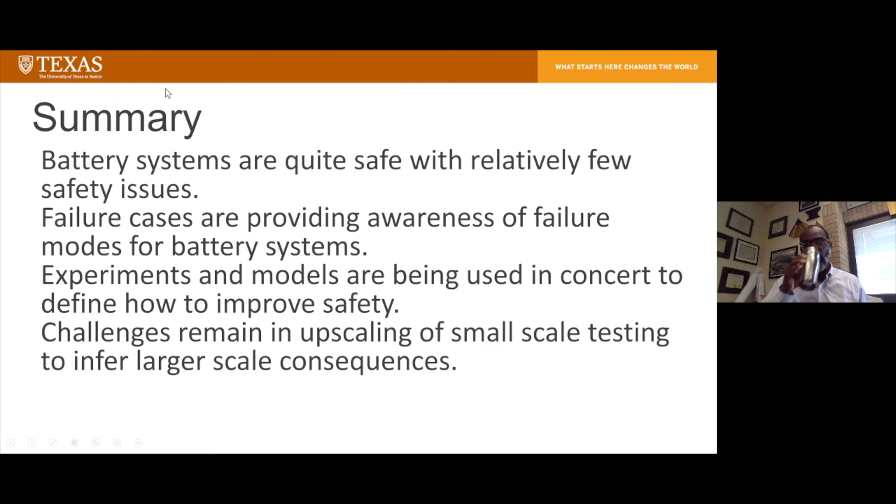Whew, that was a great topic, TK. Looking at all the questions in the Q&A window, we may need to put a short course or workshop together. Great idea. And you know, even just looking around my office, I think I have 6 devices just in my room here.

So let me go ahead and lead with one question at least, and then hopefully we'll get room for another. You touched on this, but are we doing ourselves a disservice when we speak about lithium-ion battery safety by discussing all battery chemistries in the same light? Shouldn't industry standards research treat the fire mitigation requirements for NMC and LFP very differently, given the difference in their thermal runaway and off-gassing? Yeah, no, that's absolutely an excellent point and question.

Energy density is important. LFP is, I would arguably say, a safer chemistry. I saw some results recently - Matt Paiss at PNNL just put out some work with some other folks, and I apologize to those other people that I don't remember their names exactly, where I was shocked to see there was 50% hydrogen concentration released from an LFP cell.

Now, the temperatures that they reached were much lower than NMC, for example, for the nickel-based cathodes, but still, if there is a fire or some other thermal event and I'm releasing 50% hydrogen, that bothers me. So I do agree that yes, there are very important differences we have to look at between different battery chemistries, and we certainly can't lump them all together.